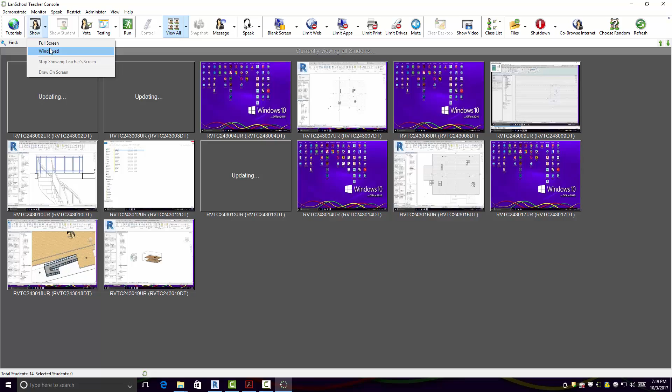All right, somebody already has that. All right, so the first thing, new. So if you're working on a template at this point, that's not right. I just did. May not be working. Let's see, window. How's that?

Really? Does everybody have a black screen? Can't do that. Not today.

All right, looks like I got it running twice here. All right, let me try again. Let me close this. All right, it says it's open. It says it's running. Isn't that something?

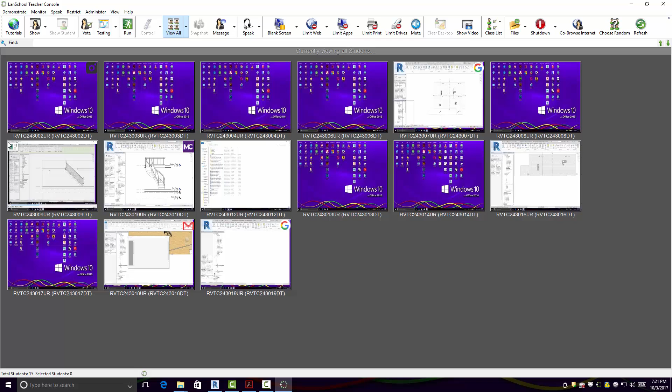Right there, you have only this thing that only one screen is active. I'm sorry? I don't know if you were supposed to click on the other screen too. It's just showing one screen. Hold on. But these are all your screens. I can see what you're working on. All right.

So usually when I do this in Windows, let me try full screen. Did that make a difference? Is your screen black? Did it do anything? Right there, do you need to click on the screen number two? Usually not, I don't. I only have one monitor. Okay, so how about now? No. Didn't think so.

I have no idea what terminal is. Did it do something? Well, that's okay. How about now? Black screen. Yep, I'm thinking we're not going to be able to do this. So that's going to be one of my complaints. And I rebooted the computer too.

So I am so sorry, but I'm still recording, so I'm recording here. All right, so you say new project, and I'm going to go find that template. It's on my desktop. Hopefully it's not spoiled. No, it's fine because it's upgrading. It's 2009.

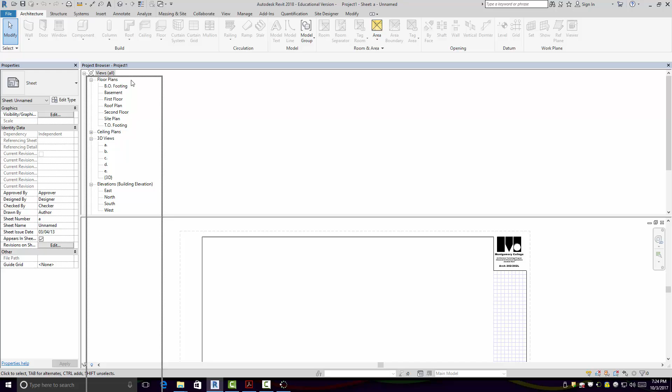E is the ramp. Okay, and so if I go to first floor, actually we did do this. I remember now, when I was starting to do my own landing and stuff, I couldn't. Okay, I listened to the tape too, but all right.

So what I got here, I got 0, 0 for the first floor, and for my ramp base I have minus 3.25 feet, which is 39 inches, which is roughly a meter, right? So a ramp needs to be a 1 in 12 slope.

Ideal is 1 in 20, but 1 in 12 is what we typically work with. And so that would mean that for every inch of elevation we go, we need a foot of ramp. So we got 39 inches, so we need a 39-foot long ramp.

Also, by code, there's a maximum number of feet for a ramp, or the elevation, actually it's 30 inches. So the maximum you can have a ramp in one run is 30 inches, right? So the maximum you can go up to is 30 inches, which is a 30-foot ramp.

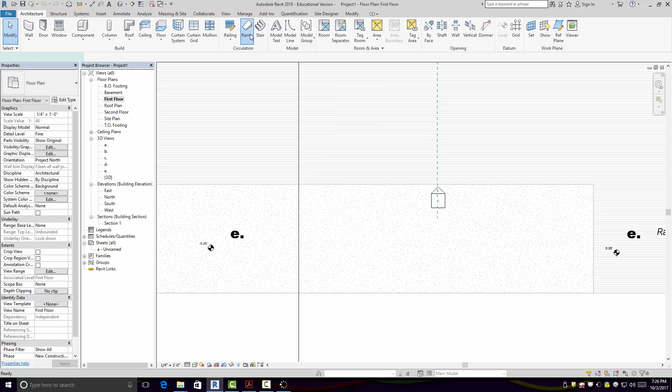So Revit automatically has that set in the parameters of the ramp type. So I go to sketch mode here to ramp. I go run, I'm going to pick run. I look here and I'm going to change the base constraint.

Yeah, this baby's phasing in and out, oh, it's in bad shape. And then I'm going to set this for first floor. Okay, so ramp base, the first floor, that's 39 inches. I'm going to make it 5 foot wide.

I'm going to go edit and make sure all this is good, and we're going to make this concrete. I'm going to make mine concrete, I don't know about you. My category is usually a generic gray, which you probably have already experienced. So I'm going to go here and break up the thing and type in concrete.

Ooh, terrazzo, look at that. It's the first time I've seen terrazzo.

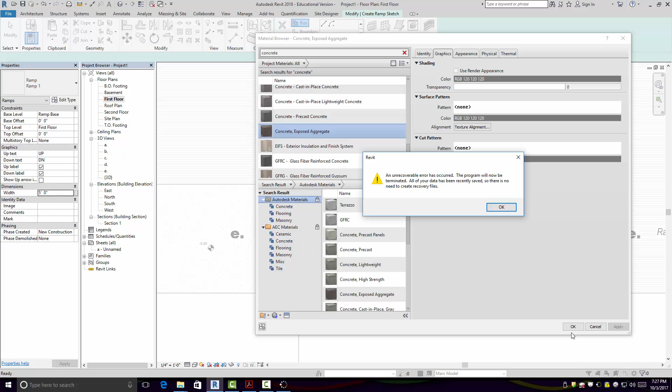Yeah, this is blurring in and out, at least I think, I hope it's not me. Uh-oh, Revit just, we just had an error. So hopefully we're not starting over again. We're kind of. All right, I'm not going to send it to Autodesk.

Okay, so I'm going to dock this. Yep, video stuff.

Alright, so I go to my first floor plan. I'm going to save it now so I won't lose it a second time. So your files are going to be your name, Stair, assignment.

And that thing keeps... can you guys see how it's blurring in and out? Is that Jan that said yep? Yeah, you probably fixed it so it would do that.

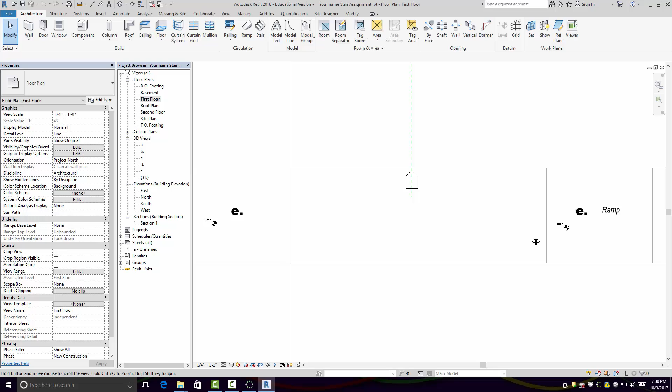Alright, so all the things I just said before. We're going to go ramp, and we're going to go run, and we're going to set this for ramp base, and we're going to set this for first floor, and we're going to set this for 5 feet. We're going to go edit here, and we're going to change this to concrete. Hopefully that's not where our issue was. Cast in place concrete, I'm just going to use that.

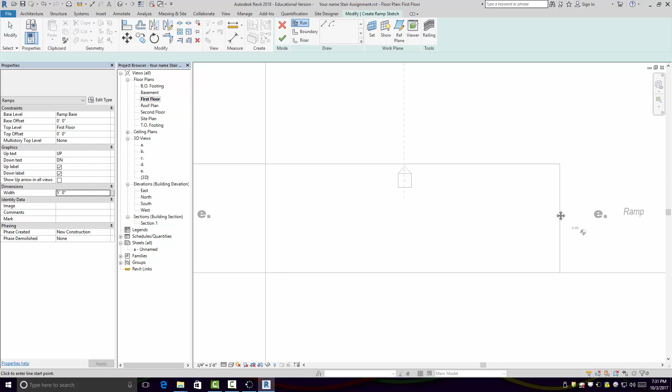In fact, I think you asked a question, which really you can go either direction with and flip the stair. So because I don't have a ramp base floor plan, I think I'm just going to do it from the first floor.

So all I have to do is set for run, and that's going to be 5 foot wide, and you can see it's actually keeping track of the feet length. It says 30 feet, and if I click, it should be saying 9 remaining. But if I click here, now it says 9 feet remaining.

See that? So if I come here and line this up right here, I can move it over here if I want. This is actually the center line of the ramp. So I'm going to bring it over a good distance, and I'm going to pull it all the way out. That's my 39 feet.

There's the landing, it forms automatically. So what you did is you stopped at 30, you then came down straight down, then followed the dotted line right here. If you remember with the component stairs, you had a location line. By default, the sketches are center line, so you have to at least clear the edges of the ramp.

So if I wanted this to be closer, I just do this, window it. Everybody's familiar with stretch in AutoCAD kind of, and just kind of move it in.

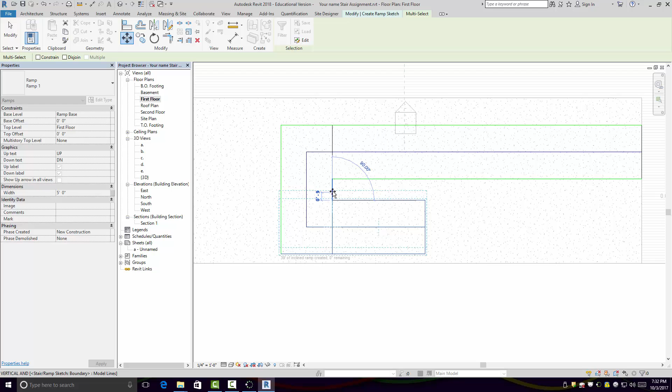I can actually even dimension it if I want. So if I want it to be a certain dimension, I could dimension this to that. Oh, it's an uneven dimension. So if I want that to be 1 foot even, pick that, activate dimensions, make this, get rid of the fraction off of this, and it moved it, and this dimension is inside a sketch. So when I finish the sketch, the dimension will disappear. Boom.

Alright, I'm going the wrong direction. But no problem, no sweat. What I'll have to do is click the ramp, and then this blue arrow at the end, I just click it and it reverses direction. It just reverses it. You go 30 feet, go straight down to the center line.

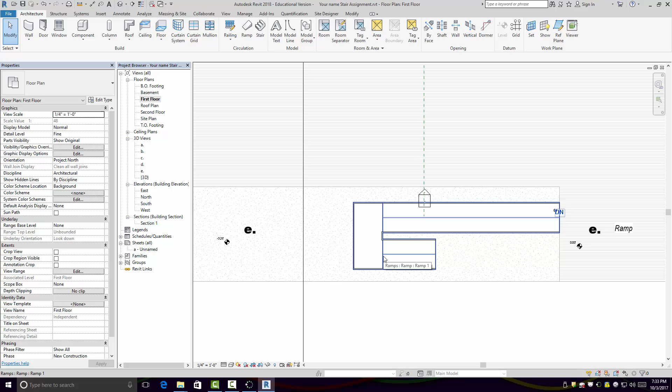You'll activate, and then you'll continue, right? You don't press anything else. Nothing else, you just have to, it will show you the alignment. You just have to be in the center line of the ramp here. There's no location line.

And then the other thing you did is, in order to bring it closer or farther, you dimensioned it with the angle, with the diagonal one, and you dimensioned that area. You clicked on it, and then opened up the activate dimension. Correct, activate dimensions, and then I could actually control what my dimension is. Make sure you select the whole area though, you got to pick everything that relates to that dimension change.

So when I say activate, now let's say I want this 2 feet, just to prove that it works, and it pushes the whole thing out. You have to highlight both, right, you have to window it or cross. Window both ramps.

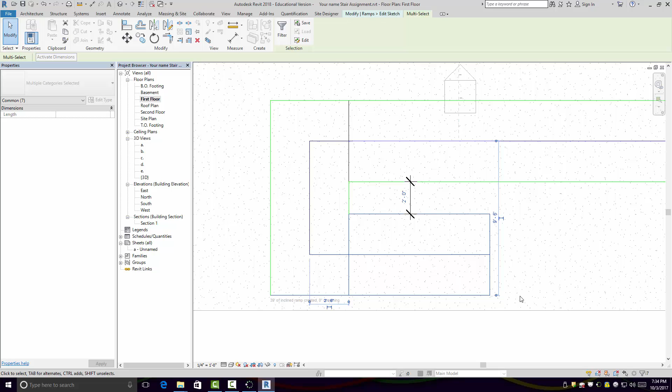No, just the one, just what I was moving, just what you're going to move. So if you wanted to move the longer 30 foot, you would just window the 30 foot.

I can move the whole thing as a sketch, or even, if let's say the configuration's just right, I can just take this and move it as a solid. I could just move it up. I just nudged it with the arrow, but you can move the whole thing. So that's kind of what that's about.

That guy looks familiar.

All right, so if I say Baroque, that's what I asked for. Baroque stair, right? So you can do something fancy, basically. And if you speak French, you know that helps.

All right, so I've got that from level F, right? It's going to be from level F. Let's see, come on now. F to C, right? No. Yes.

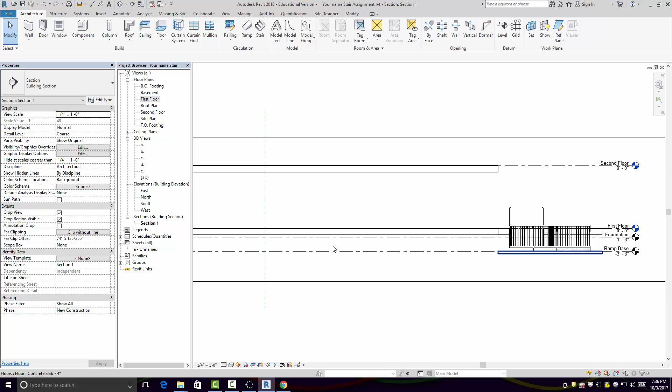It just says to the second floor, so I'm not sure, wasn't sure if it's talking about from the ramp base to second floor, or like from the first floor to second floor. Let's do it. The F's down here, so I probably meant that.

So it's actually 2 flights. Let's do a section through here. I'm going to do a section here, and we're going to do it on this side.

I'm going to duplicate this. This makes things a little easier if you do that. Actually, we were supposed to do it. I'm just trying to shortcut.

We'll say first floor, stair F.

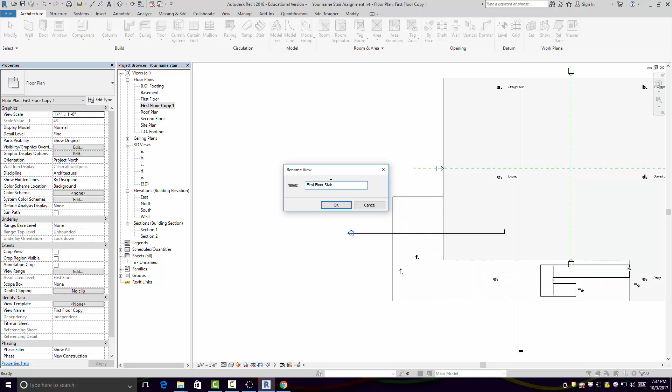All right, let's say I'm gonna have 2 legs and something, and it comes up with a landing.

Okay, if I go stair, I don't really have anything in mind. So if I do a full spiral or one of these, I'm gonna set this from ramp base to second floor, 19 risers.

So I might do something like this. And you can actually count the risers. So if I go half the risers, I might go to 11 risers created, 8 remaining. Maybe something like that.

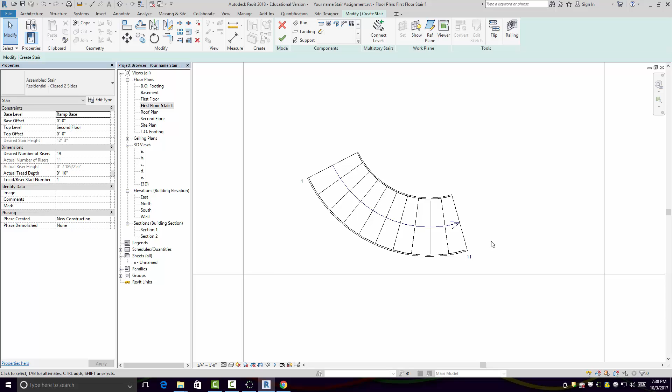That's not going to let me move it. Oh, I'm in sketch mode. Okay, and then maybe the balance of them are this direction.

Whoops. Left. So just don't forget that justification, that location line is there. Notice that it's automatically setting up the landing for me. Maybe I should have actually gone the other way.

So you could do something like that. What do you think, Aaron? You like that? Okay, you're easy to satisfy.

Let's say I move that over there.

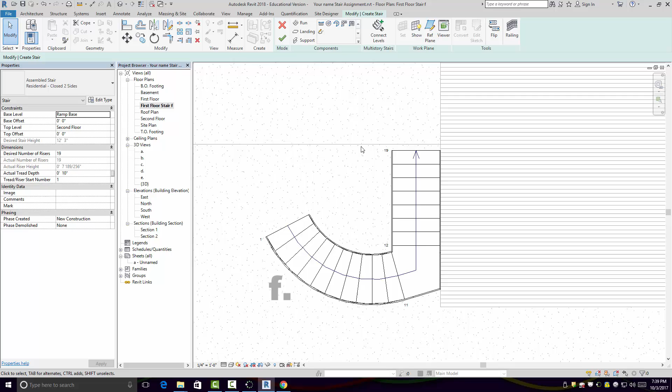I guess there's several, we could probably spend some time on this, but I'm going to take this and mirror it, so that I have two. What do you think?

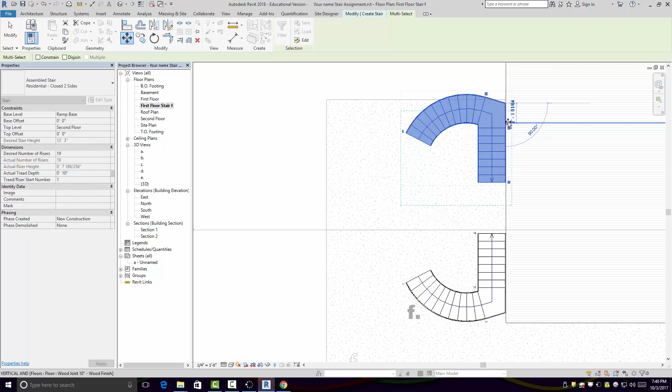You can decide what type of landing width you want. But when you finish the sketch...

Yeah, it knows it's not connected, but okay. And then the easiest way to deal with the landing is to extend the floor out. Right, so if I go edit boundary, and I go to the first floor, or is that the second floor? That's the second floor.

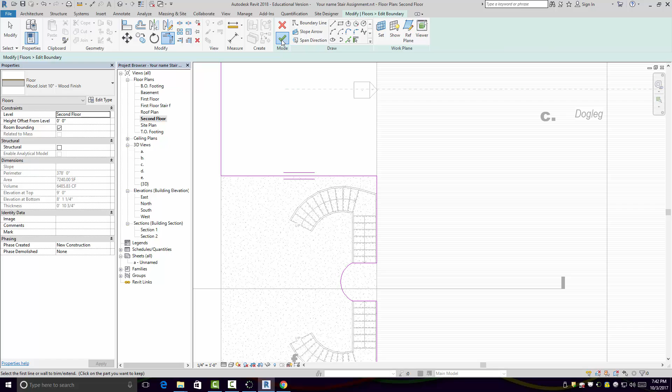What do you think? No, no, I'm not happy with it, but...

All right, so these could be different types of stairs. They could be monolithic, which makes them kind... I might get a little error message because I don't know what I did.

I probably should have started out with them. Yep, yeah, I'm out of... so it looks like that. I'm short a riser because the riser height was different.

You can do something with the railings, change them to glass panel railings.

For being short one riser, what's a quick way to remedy that? If I pick the stairway and edit it...

This was 7 3/4, right? I don't think it's too late. No, see, notice the maximum and minimum riser heights are different for this particular type.

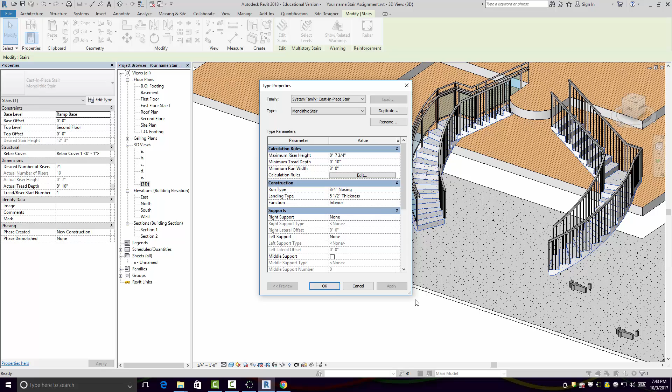So you probably should make sure that those types are the same. Actually, it's too late now, but before I changed it, I should have changed the riser height to match the one I did.

The other secret to make it fast, you can also change the railing panels before you mirror it on the other side. Or you can do them all at the same time, I guess. I didn't do that.

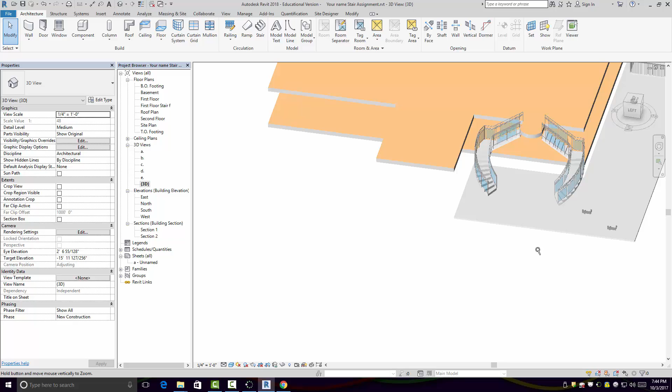So what do you think? Everybody's afraid to tell me. Man, those are lousy stairs. Well, you're short of stairs. Yeah, I think you have to do it again.

No, I really need to get to the Carlyle. I'd love to do it again. Actually I'd like to spend... didn't you hear me say I could spend some time on this, because just coming up with something? But I looked at these.

You could actually look at one, and here's the interesting one. This would be an easy one to think about. Now this one you could actually... I showed you how to edit a sketch. You would just basically edit the sketch.

The railings is a challenge, but it can be done in Revit. We're not covering that though, we don't have enough time for that, but that's kind of the same idea I had for that.

Okay, actually the Carlyle stair is a little more challenging than you'd probably realize.

So the second part of this was to put a roof and put a stair in the Carlyle. I have the Carlyle, I have my sort of Julia Childs version. I'm working on this at the same time you guys are. Let me show you where I'm at.

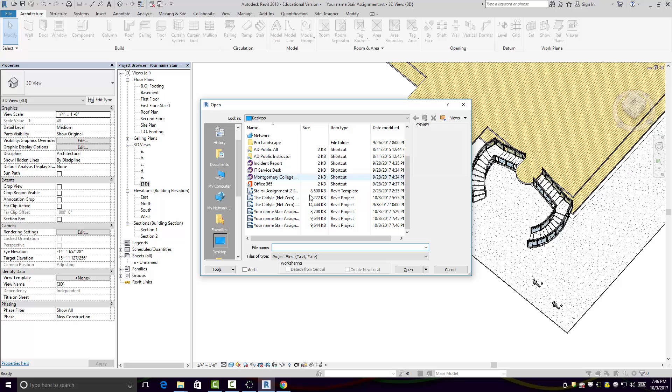Why is this acting up? This is really gumming up. There we go. Just go ahead and save it. If I open, I'm going to open the one that's more progressed further. That's got to be this one. It's only 14 megs.

So what I'm going to do is I'm going to ask you how I did certain things, and...

Is it doing that on the screen? Does it stay focused on your screen? Oh, that's right, I forgot. So that could be it.

Okay, so you probably looked at this and thought, how am I going to do this, right? Forget this, this is some kind of thatch roof. I'm not that familiar with it.

All right, so what I've got is this. It's not completely... So I've basically got two basic gable roofs, right? You've got a gable roof over here, and you've got a gable roof here. This gable roof is 12 and 12.

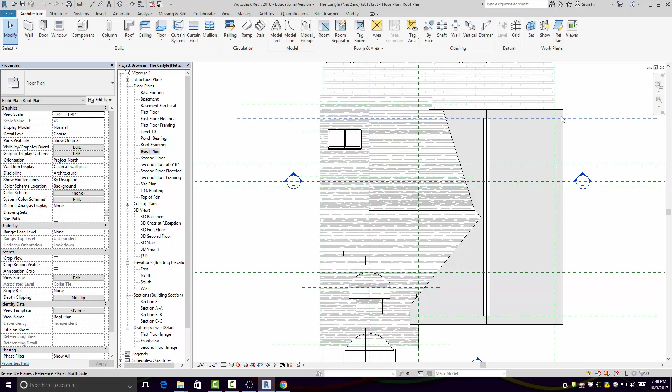Let me show you in plan, by roof plan maybe. So this roof over the second floor, over this portion of the house right here is a gable roof. Everybody following me on that?

12 and 12 slope, right here. This is 10 and 12. I found that to work reasonably well, but let me talk about it a little bit. There's some latitude for you to do something a little different here too.

So this I did by roof by extrusion, I think. Let me make sure... No, this is by footprint. So I did this 10 and 12 right here. Notice that the base of the roof is on the second floor in the back and goes down in the front.

So if you look at the picture, it comes like that, and here's the two portions. Got me?

Where you have latitude to have a little interesting fun is this front window. Now I still have to create the opening for it. I don't like having a secondary roof here, but one thing you can do is extend the floor so it actually crosses this rafter here at this level. Everybody kind of get what I'm saying here?

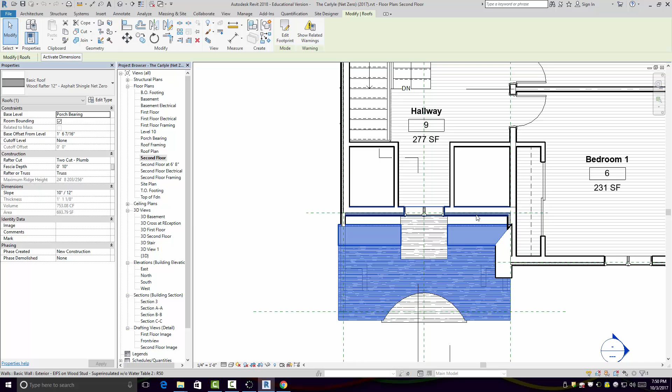So this floor I've ended at the wall on the second floor, right? See, here's the wall right here. That's the same wall as the one below it.

One of the things that helps me is I created a floor plan, because the roof is so low, it's actually cutting across the floor plan, because a floor plan is what? A horizontal section cut at 4 feet. So...

What happens is you get something like this, where I've got skylights here, and you see part of the roof, and you can actually see where the roof cuts that 4-foot plane, right? Even over here, which I have to fix. So that's 4 feet right there.

But if you were to do 6'8", which is more of a person's clearance height—6'8", 7 foot, something like that—it looks like that. So that tells me a little more about what actual space I have to work with.

All right, so when you look at it in section—the other section, I guess that's one section—it looks like this. So this line right here is my 6'8" line right here. So that allows you to move the roof up and down.

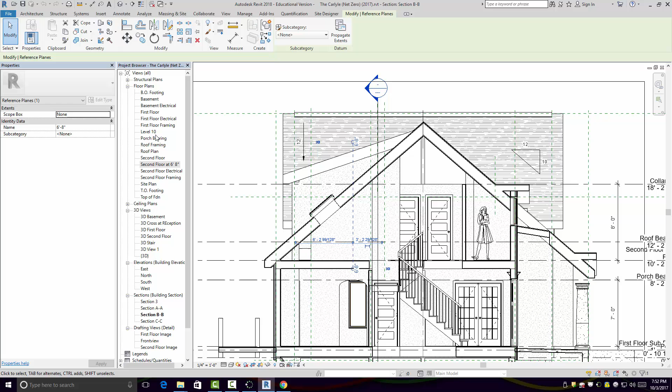Alright, so I made this roof by footprint as well, and this roof by footprint, I joined the two roofs. I'm going to go through the process with it. I joined the two roofs, and I cut the V out, right? You know how we cut the V out? What's he talking about—the valley.

Alright, so if I did this—isolate element—so this is that 12 and 12 roof. I basically took the other roof that merges into it and cut that portion out.

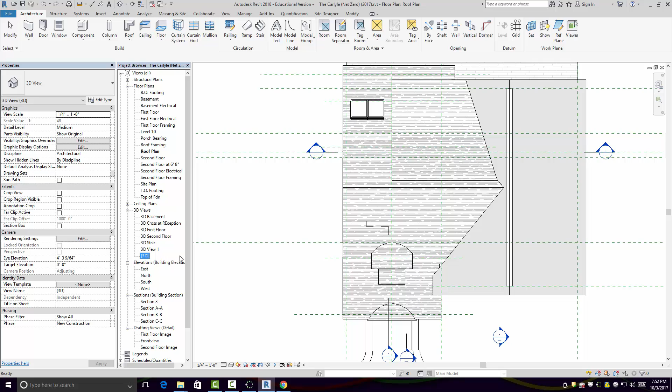I've got to do something back over here. This is where you'll probably have to do a little work and figure this out as you're working on it. But here's my other roof, right? So that's the 10 and 12 roof right there. So if I were to isolate it, it looks like that.

You can make it better. These are actually openings, right? So I used shaft or by face. Dormer works as well to create these openings. This opening, as you can see, is the dormer.

I'm not happy with the shape of the dormer. I'm going to come back and fix that. But to give you some idea of how you should do these, they're done by extrusion, right?

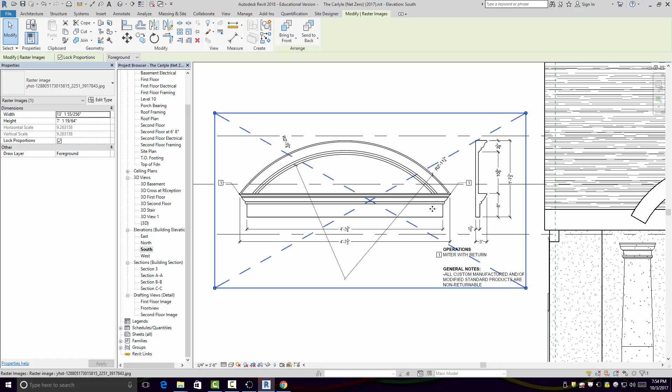And what I use for these, they're called segmental arch, right? So this is actually a raster file that you can get off the internet, and basically my radius is going to be twice this. It's more like 4 feet. Mine is a little too round, so I'm going to flatten it a little bit and work with it that way.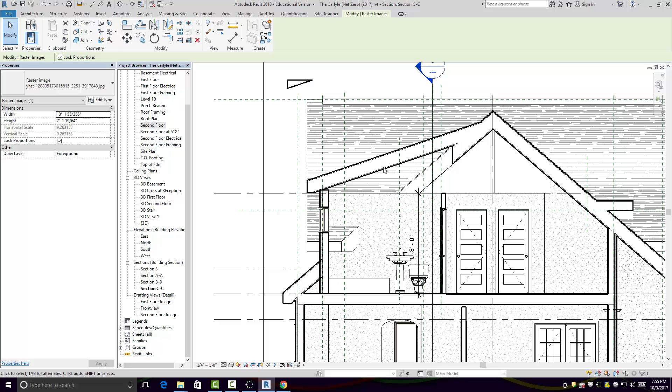And then this particular roof... isolate this baby. Looks like that. So what happened on this edge is I used the join roof tool, that's this tool right here, to join it with the roof on the other side. So when I reset this, right here, I'm working on getting rid of this right now because that actually cuts into my space, but I'm going to trim it out.

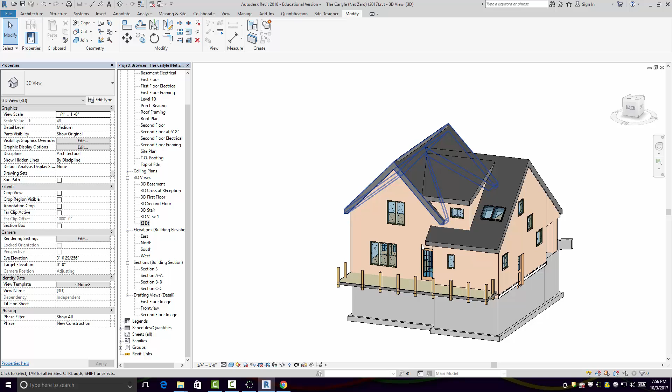I don't want to say that's it, that's all there is to it, really. All right, so that is the roof.

So I'm going to open a file that does not have a roof. Let's see... open. Actually, don't have... it probably doesn't have even enough because I might not have the walls in there. All right, yeah, this one doesn't have a whole lot to it. See that? Actually, I don't even have the lower walls. That's not right, that would not be right. Doesn't have the basement walls. So this is much earlier. Hold on. Open project.

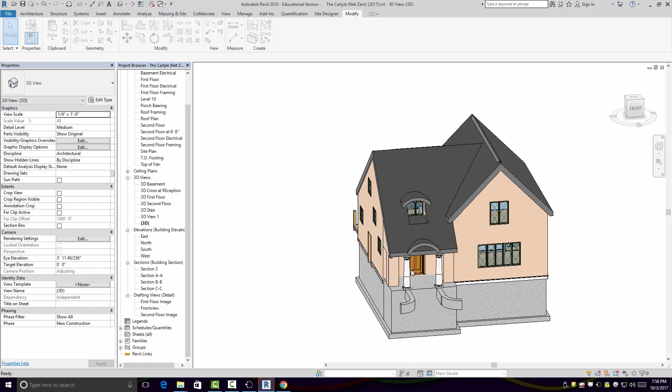Okay, let's see what I got here. Oh, that's not nice, did you see that? The Windows 10 flashing through there? So there's a display issue here. Oh, I still have a roof on there, okay, so let me get rid of the roof.

All right, so first thing is the roof on this portion. Doesn't even look like I got the layout here. All right, let's see. All right, so you're going to do a roof by footprint, so architecture, roof by footprint. I might have a little bit of overhang, 1 foot 4 inches maybe. I don't know what I actually ultimately wound up doing.

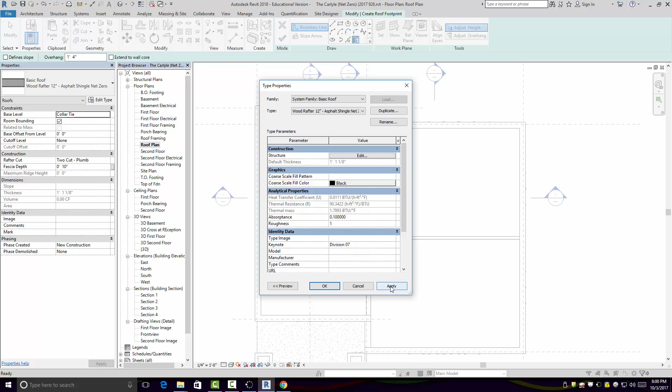One of the things you'll have to go back to look at is the wall section that I gave you. Remember, I gave you a wall section with a description of the roof, which is a net zero roof, and that roof should be asphalt shingles, roof felt. Is this it? Yeah, one difference is it's got rigid insulation on the bottom at 1 inch. All right, so that makes it kind of cumbersome because it's so thick.

But if I go here and click on this wall, turn on the slopes... bummer, all right, let me try it again. So I'm going to pick walls, right? I'm going to use a 1 foot 4 inch overhang, and I'm going to turn on the slopes. So I pick that wall, I pick this wall, the slope's going to be 12 and 12 and 12.

I'm going to pick the back wall. It doesn't have much overhang - that's actually a rake when they call it back there. Right there, and no slope, because it's a gable, right?

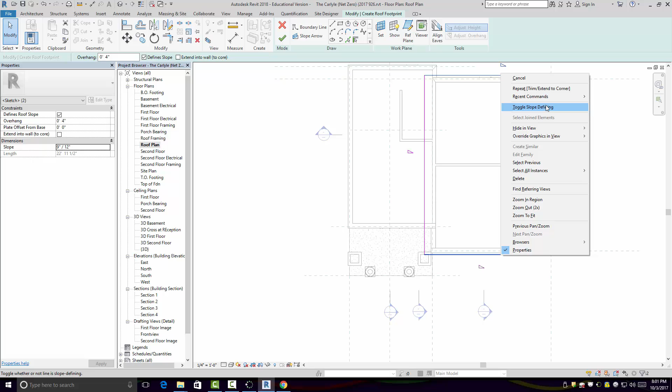So you turn off the slopes. I pick this, touch the control button, add this to my selection, do a right button click, and say toggle slope - that's the other way you can turn the slopes off. So I have 9 and 12 on this one, and then I played with this a little bit, so I'm going to set this at what elevation?

It says collar tie, but that's not where I'm going to set this at. Roof framing, which I think is actually a little low. And then I'm going to say finish, and go ahead and attach the walls to the roof. So my roof looks like so.

If you have a wall here, what it'll do is it'll attach the wall to that, and these doors are here, and it becomes obvious that this part of the roof won't be there when you're done modeling it. So what do you think? It's better to do the gross sort of roof cover and then go back and modify this space.

I gotta understand the question. So if you did that roof, now you're going to do the other roof, but you're going to leave the current roof in place. Once your roof's all there, you start to line them up geometrically and join them. Yeah, or modify them, open your volume up. That's the only way I'm going to be able to do it - once I match it with the other.

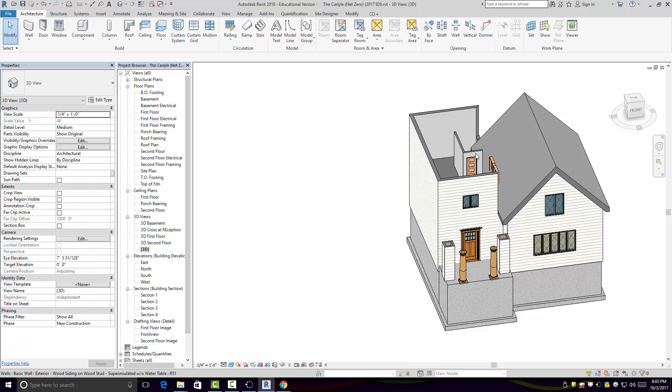In fact, I'm saying there's some latitude to express yourself with this - it's actually kind of a neat way it is. But anyway, I'm going to come back here, and now I'm going to put this one in.

And that one I'm going to simply do by footprint. I'm going to do it by footprint, but sometimes it's not a problem to do it by extrusion - but I'm just going to do this by footprint. So my slope is going from front to back, right?

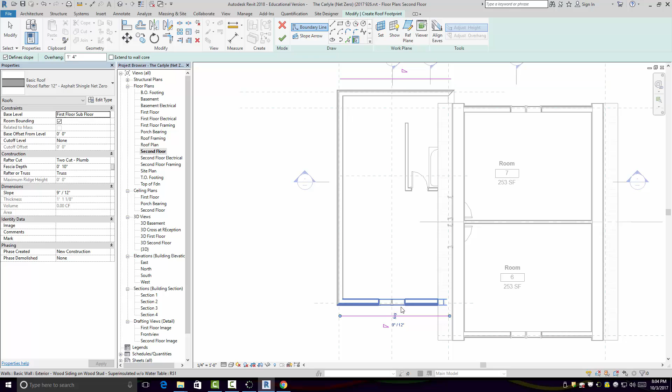Actually, let me try something different. I would have done this anyway to see how it worked. So I'm going to put an overhang of 1 foot 4 inches over here. Actually, I've got a porch here with columns - I gotta address that, right?

Right, so it really should be out to here. So I'm just going to pull it out here, or I could have drawn it out here or whatever. But I'm going to pull it, and put one here with the wall.

So we'll just make this a 4-inch rake, but turn off the slope on this, and we're going to trim this out. Oh, it's already trimmed out. All right, maybe let's try.

I'm going to try 12 and 12 here - I think this has to be flatter. And then I'm just going to connect the two with no slope, because it's a gable end, right?

And I'm going to set this for second floor, and I'm going to finish it. I expect to get some fussing, but it seems to be working. All right, so when I look at it, it looks pretty bad. So that's why I had to flatten it.

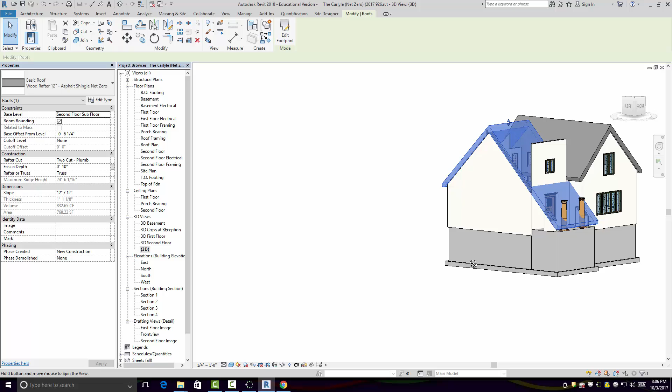So you could have actually a bigger dormer up there - everybody kind of visualize that? I could cut this and have a bigger dormer up here, except my roof here would be too low. And then I would just maybe divide the roof and make it a different slope, but it's better if it's one plane.

Alright, so I'm going to come here and go back to second floor, pick this one, and edit the footprint. And we're going to go ahead and make this both - make it 9 and 12.

Let's make it 8 and 12 - make it real interesting, see what we get. Alright, and then we'll look at the section. So there's way too low. So for it to work, it has to come up here.

Actually, I want this - this is kind of my controlling point right here. Well, this could work, it's a little different.

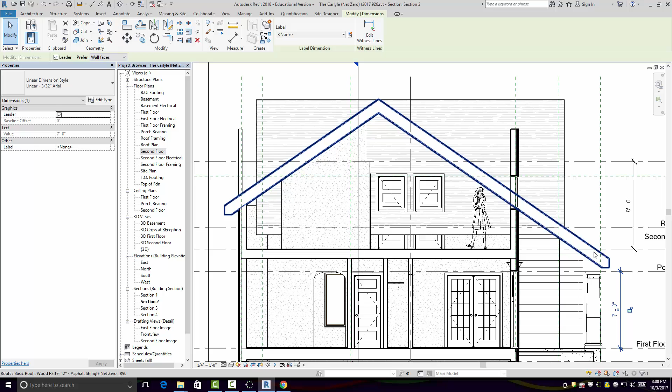Actually, that's not too bad. I've actually got some height here. In that other scheme, I've come down here and it's actually crossing the floor, but this might not be too bad. Let's take a look.

What do you think? Is that why you're saying put a dormer in that space to bring out the height? Right, in that one spot. If you look at the original plans, this is kind of like the dormer. So all this area is supposed to be roof, right? All this right here.

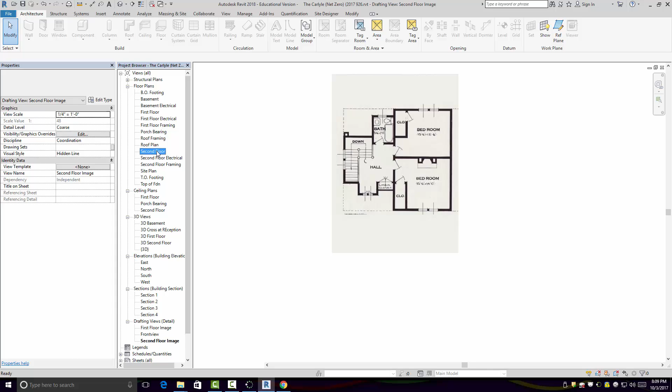And so if that's going to be roof, then I'm a little different. I don't know how accurate this is. This was a marketing data roof plan, so it may not have been as accurate. Actually, that's pretty good. What do you think? Should I go with this?

All right, let's say I decide to go with this. I'm gonna go modify, and go roof, join roof. Touch this edge to this plane, and that roof will join with that roof.

Do I have my little... I still have my person, so this wasn't that long ago. The dormer here will have to be up at least up to this point, right?

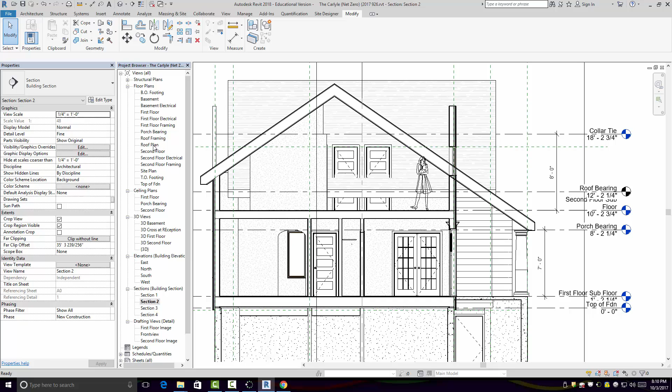So I'm going to go back to this plan, roof plan. What am I doing for time here? Second floor plan.

This is opening by face. You could do that, or you can use... I don't think this dormer works for this. Nope. Or shaft.

Gotta see what I'm doing here. A little too early to put that in there. So let's look at the front, south front. Yeah, this one's going to be bigger. This is bigger than this. This is pretty tiny.

So we do the segmental arch by going to roof by extrusion, and we're going to pick a plane. I'm going to just pick this plane right here, and then we're just going to make an arc.

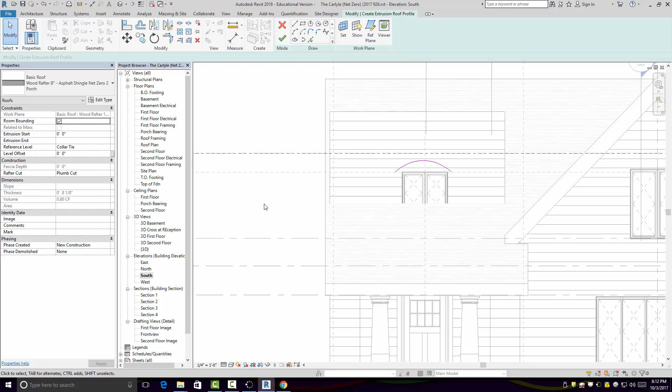I'm going to change the roof type to 8-inch. 8-inch framing would be 8-inch instead of 12 inches, so it won't be quite as thick. So it looks something like that. It's really not that great.

Okay, I'm gonna take this, make it a two-cut plumb. Give it a fascia. A little better. Yeah, that's a little high.

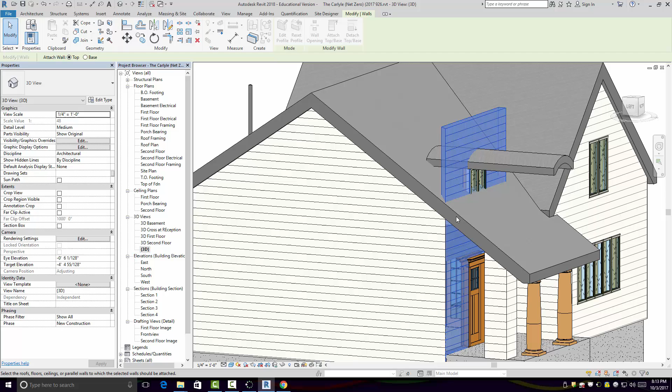See, if I attach this to... I can either attach it to this roof or I can attach it to this roof. Only part of it will attach to this roof. So if I attach it to this roof, I knew I would get a... it's gonna eject the windows because the windows aren't applicable anymore.

I'm sorry? How did you set it before? Originally it wouldn't accept it because you had a window there. Actually, I've got to do something with this wall, and normally you would just attach it to this roof. And actually, I could come back and put the windows back. It just killed the windows.

So when I look at the section, and the reason I've got this lady here is so that you can see - if you're standing there, this is what you want to be able to look out the window, right? At that certain elevation, so you'd want the windows. Actually, the windows are a little lower. Well, if it went up there, that would be pretty good.

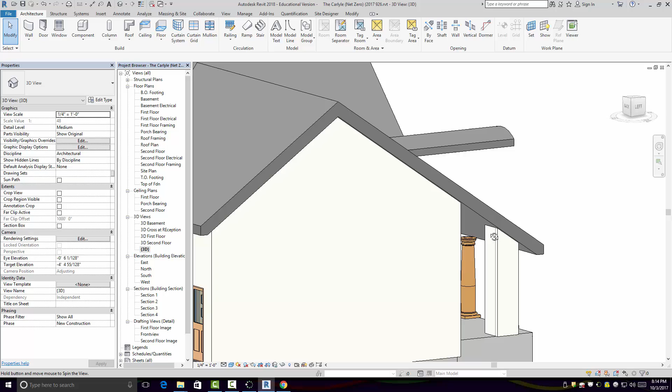So if I join the roof, if I take this, join that - too small. So maybe I want to make it bigger.

So if I looked at this section here, think about the things that would happen if I flatten my slope a little bit. That's not going to get me much. All right.

I'm going to make this a little bigger. So what is it now? Edit Profile. It's 3 feet.

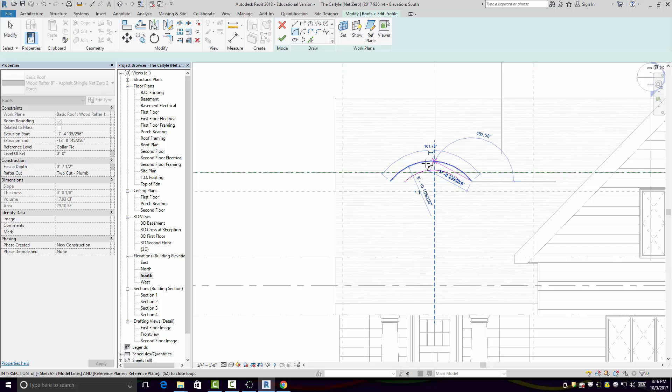You might want to be more measured than I am being here. Not might - notice I'm doing it by eyeball. So if I got something like this, I want it to be symmetrical, so I need to make sure I have it in the middle. See, that's not quite on the middle, so I'm going to move that to the middle.

And you could actually make several until you find the right size or right thing that really works for you. What do you think? Any opinions? No opinions. Now, if you'll notice this one,

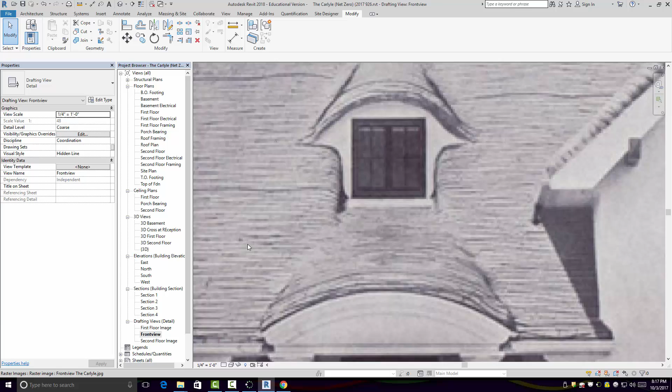it's kind of tucked in versus sticking out. That's kind of odd. For it to be tucked in, it would have to be like this. There'd have to be a flat area here. Is there a flat area? Do they show a flat area? Let's just distort it.

So if I bring that to here, alright, and then the south—you guys are quiet. Is everybody awake? Guess not. Architecture, no questions.

You just verbalize what you're doing each step—that'd be good when I'm listening. If you verbalize each step, right now I'm going to put the segmented arch here. It's just because when you're listening, it's hard to catch where the errors are going.

So I'm kind of feeling my way, kind of designing here, because it's not exactly like it is. I want to give people a little latitude to change things a little bit. So let's say if I got that radius.

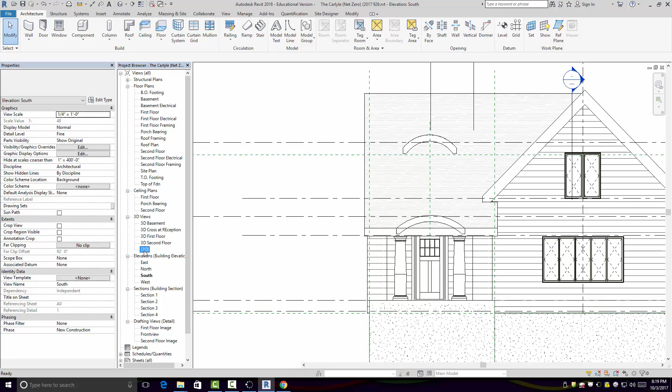If we look at it in 3D, it looks kind of like that. So I can pull this out.

So join roof edge. And roof plan—I can always go back to roof plan, right? What's the definition of a roof plan?

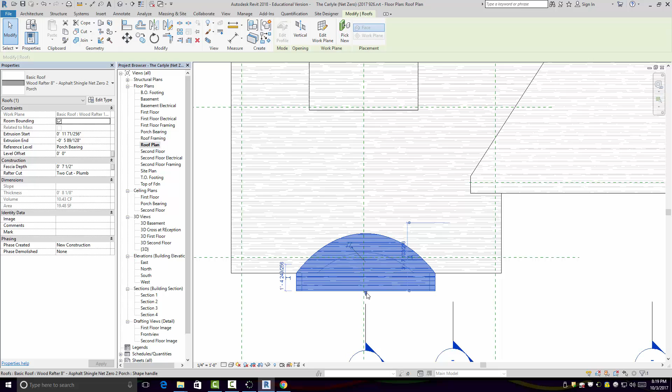You just totally ignore me. What makes a roof plan different than a floor plan? The roof plan is for the roof, the floor plan is for—it doesn't have a section, it's just showing the top of the roof. Right, it's more of a bird's eye view than a horizontal section. That's so—Ben was over there going...

So, all right, I'm gonna go here, wireframe, and I'm gonna just edit this foot. Oh no, I'm not. I'm going to—yes, I am. How come I can't see that?

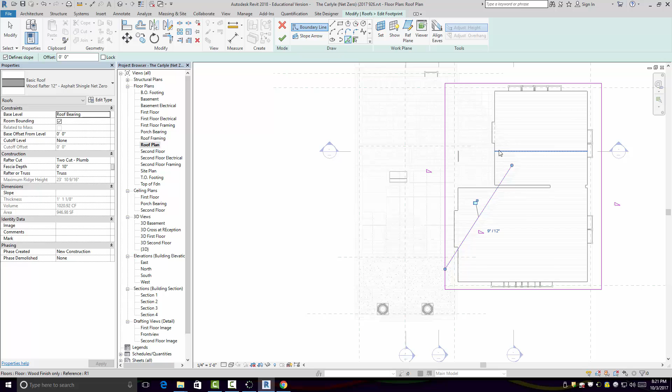No, I mean you can see it. I can kind of see it. There you go, but normally you see it better. So if I say pick lines, and I pick the inner lines here—actually I probably got an underlay on here or something. So what does that mean?

You have an underlay there? There's probably an underlay on that makes it a little noisy, so I couldn't see the lines of the valley. So that's what I was cutting, the valley here. You're going to turn the slope off. I'm going to trim this out.

And I should be able to maintain my connection. Yeah. I think it killed my roof. No, it didn't, okay—it just killed the walls. So the walls popped up.

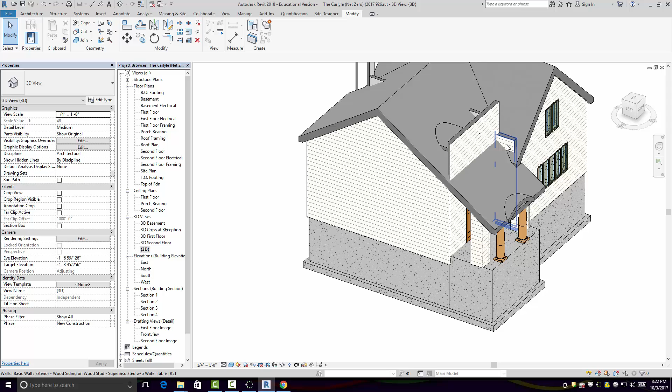All right, so what happens usually when the walls pop up like this, you can attach them back. And if that line crosses, are you attaching them? Just drop it—I'm gonna just drop it for now. Later on I'll show you how to profile the walls, so you don't have to—if they won't attach, here's what you can do to them.

Like if I take this one, this one—let's see if this one attaches. Yep. This one wall crossed the valley, so that's why it wouldn't attach. I'm gonna reattach this. And we're going to pull this pup back.

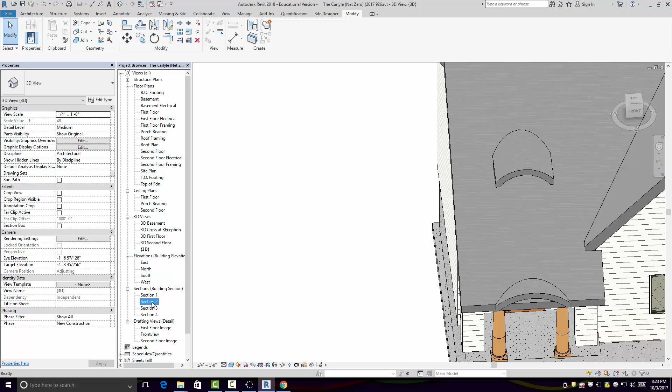Midwestern lingo there. Maybe we pull it back to here. And so maybe our dormer's back here in this case. Everybody kind of see that? So if I look at it in roof plan...

And try not to go too—I got underlay on. What I'm talking about, Steve, is no, it's not on. Well, I got wireframe on, that's probably why I can see too much.

All right, so if I edit this roof, edit footprint, and I pick lines, and I pick the inner lines. This is not—okay, now I can see it. See that? Everybody see that? I'm picking the inner lines.

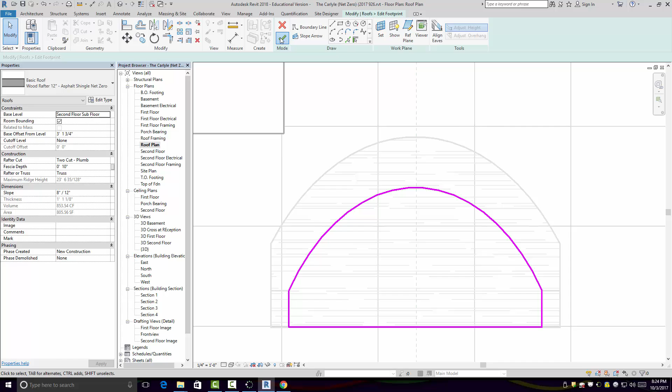Hopefully I'm picking the right ones. You guys aren't talking to me. If I pick that—yeah, it works. Maybe it didn't. All right.

So you'll get little errors, and they're not really errors, but you'll get warnings. How's that? Like that? So now I need to put a wall up there. So when I look at it in section, it looks like this. It actually cut something I probably didn't want it to cut, but I think that's okay.

So if I go back to a roof plan and I pick a roof type, a wall type. Now, usually you'd want this to be insulated. You may have to form new walls.

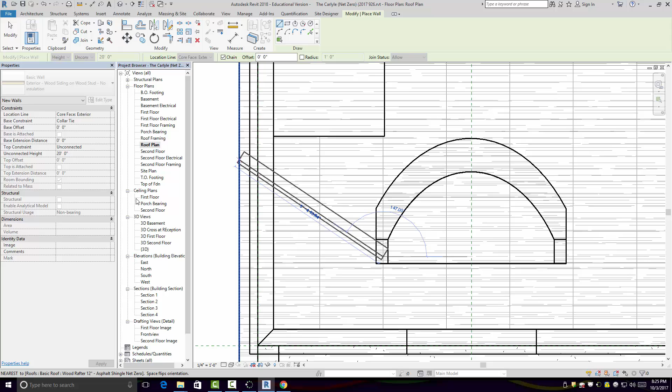For example, my exterior wall here—maybe I pick the same wall and I reduce the thickness of it. And if I draw a wall here... go in the wrong direction.

Look at it in 3D. I'll attach base, assuming I'm right over the roof. Oh, not quite, some of it is.

Pick that and say attach. Oh, okay.

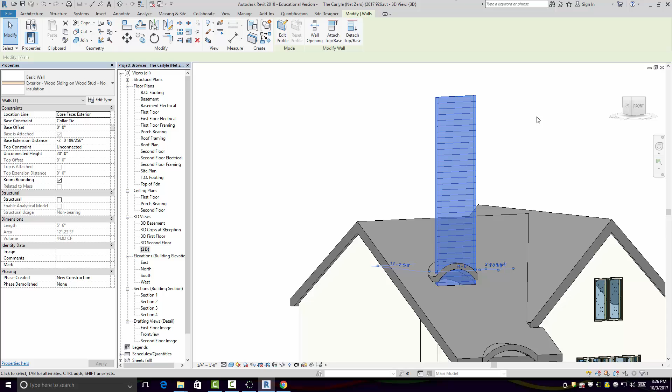I think... yeah, it's not gonna work, it didn't like that. Joining the... actually, another wall type would work. So if I create some other... oh, I actually have some other types of walls. Let's see.

Yep, still... okay, this one might require me to work on it a while. Yep, oh, that's why. Base extension.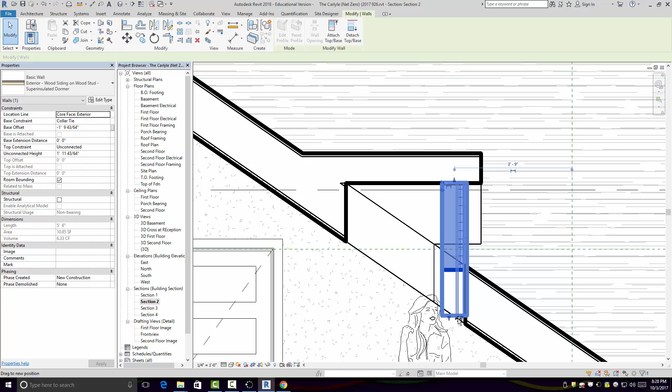I'm going to detach. I shouldn't be using a double layer like that, but I'm just trying to hurry up here now. But anyway...

So I've got that, let's see if this works. If this is in the right position now... yeah, it's in the right position now.

So that's that dormer. I have not enough room for windows. So if I wanted to add windows, what could I do?

All right, I could either raise the dormer. Well, actually, it's too high now. I really should lower it, actually, right? Because this is 6'8" right here.

So this could be like... there's actually windows that are shaped like half circles, radius...

Boy, they've added some stuff on. So something like this. Although I didn't, I should have been a little bit more measured, and I doubt if this will even fit. I'm not measured, I actually should have designed this so that this fits. Let's see, it's not gonna fit, but we'll just...

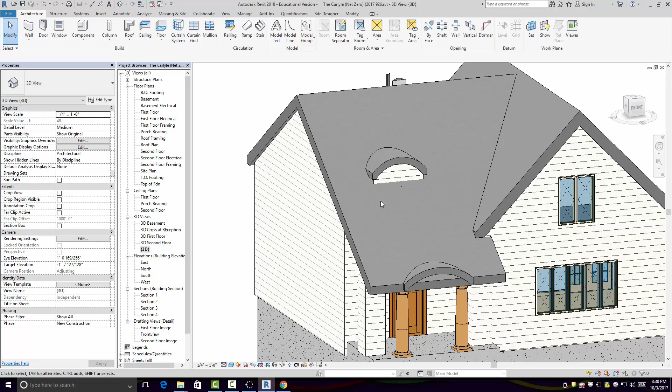So it's not going to work in here. But I could have gotten it to work in here. So if I were to come back, actually, I may... oh, there it is. So I open this up a little bit and bring the wall down.

So how do I get a hold of that? Do I see it?

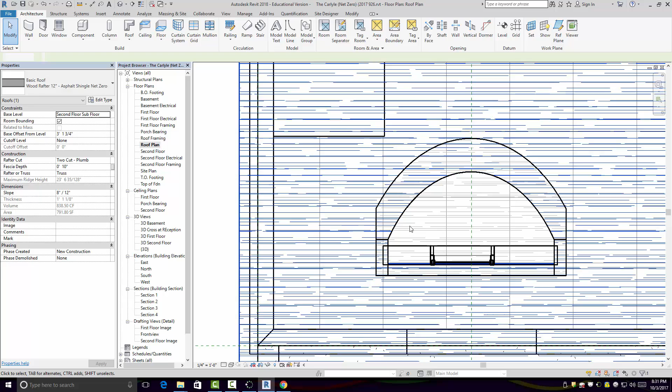I'm trying to get a hold of the opening. It's kind of late. Well, I can't get a hold of it.

Wow, this thing, does everybody see how it's fluctuating? No? Yes? No? No, but...

Sometimes openings are hard to get a hold of. So it still won't expose the opening.

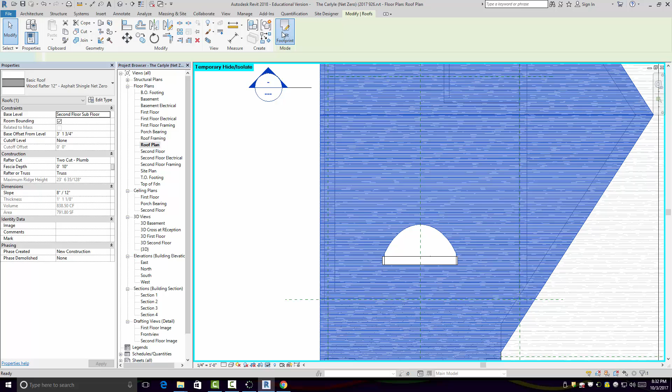Actually, I drew that, didn't I? Late in the day. So I could move this down. Let's see what happens. Didn't like me for doing that.

Roof plan, roof plan, roof plan, roof plan. Okay. I've got a little roof issue now.

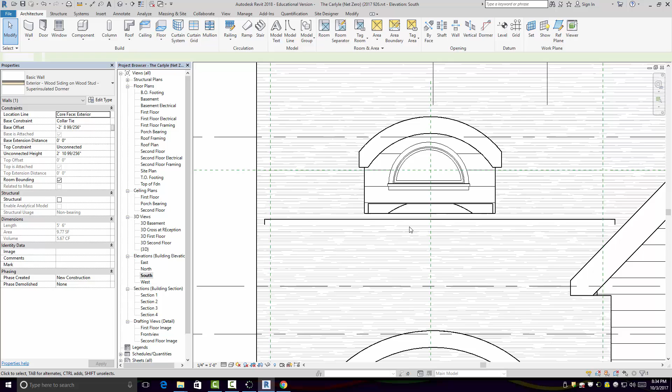Alright, so... man, I knew this was going to take a while.

Questions? Questions on how to get started? No questions? Not now? You will. What's your phone number? Good.

This is the advanced Revit course. Well, no, this is not advanced.

All right, so I mean, you have to start getting a stab, but you got... let me ask the question... you got the general idea, the general gist. You know how to start. Okay, that's good, that's good.

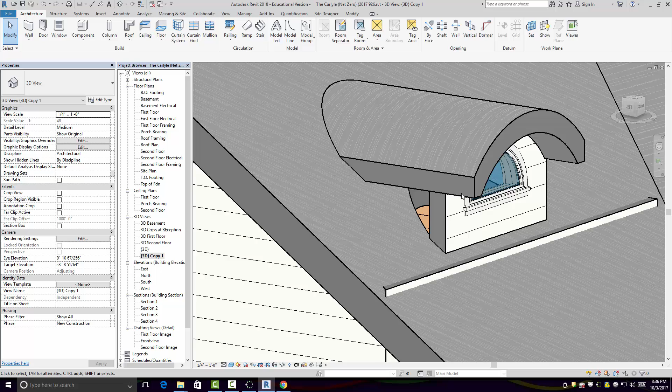All right, so with the dormer, you just have something in mind that you're going to do. That's a little better. Actually, I'd want this to be down here, very similar to one I had before. I guess I wasn't under the pressure of having to. I tried something different here. Let's see.

So if I move to the other file... it's not that one. I got two files here. So if I go to that file, actually I still have to open...

So you got, even working with this, I had to work with the opening a little bit. So I haven't even changed the opening on this one. So the opening here needs to go up here.

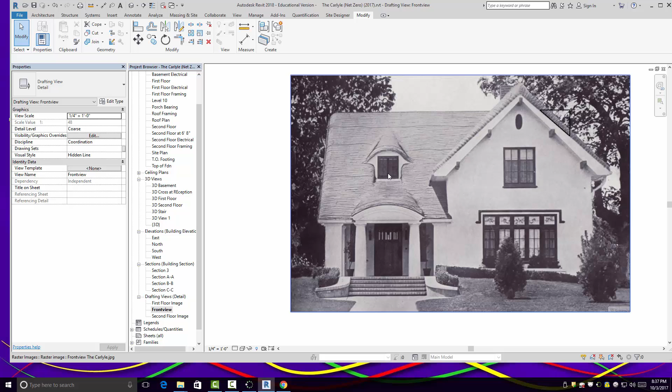But basically, you want somebody to be able to stand at the second floor, right? The second floor, and go to the window and look out the window on the dormer. And that is this right here. Right? That's this window right here.

So that's that. And I didn't even see, I have a window here, and I still need to push the opening back here even on this one. This slope was 10 and 12.

That one was 8 and 12. Did I do 8 and 12? Yeah, so you could see the slight difference. You might want to play with both. Make a model of both roofs and kind of look at the roofs together, and then decide.

And then of course you're going to cut the roof out, like when I was showing you before, like this one.

So this will be the challenge for everybody. It looks like, and this is a challenge as well. But let's see, do I have a cut? Do I have a section cut? Like this. All right, so basically, when I cut across, it looks like that.

I don't have a ceiling in here yet. We haven't really talked about ceilings, but I'll have to show you the ceilings. I started the stair. I want you guys to work a little bit so I can come around and answer any other questions you got. But let me show you the stair.

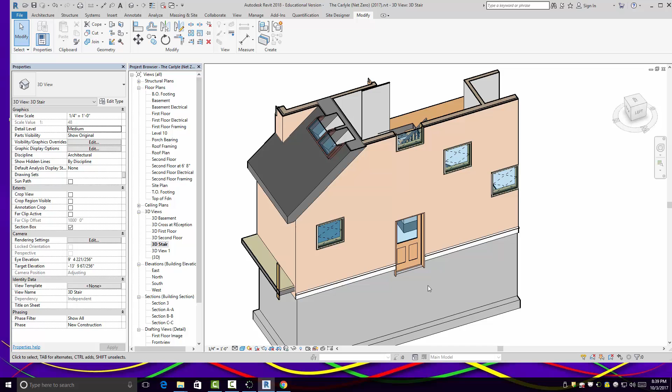So in the case of the stair, it looks something like this. So this is the side entrance, right? So this is that side entrance. Notice it's not at the floor level; it's a little below the floor level. This is a section box, right? So it allows me to see what I'm doing here.

And one of the things I got to clean up here is this closet's under the stair, so I need to clean that up a little bit. I got walls sticking up. But when you land upstairs, you land right here, and there should be a railing here. I'll put a railing there.

Right here. This is kind of dead space. This is my 6'8" line right here. So anything 6'8", so I could actually make the landing bigger.

I could actually even open this up to the kitchen below. Something I've been thinking about. So the kitchen would be this area right here. So you could actually have a clearance in the kitchen. Let me see if I got a...

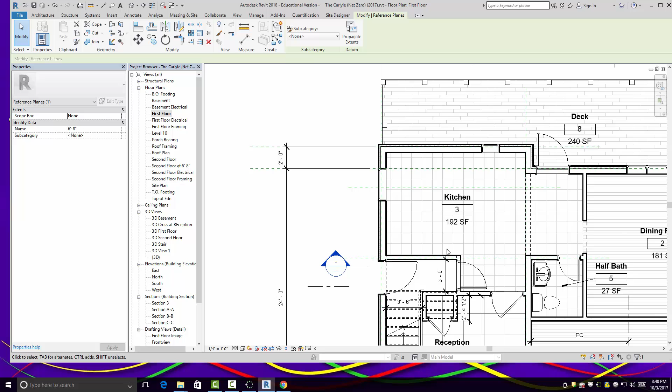So am I looking at the right one? Yeah, I think I am. By the way...

Room tags I always forget to talk about in rooms, so that's something we'll talk about on Tuesday. Oh, come on.

Right here, see the kitchen right here? So look, see all this floor area right here? See this floor area right here? This floor area is not really doing anything, right, if you're on the second floor. So why not just get rid of it and then have a skylight above the kitchen below?

Some thought, but anyway, you come up the stairs, you land right here. There's a railing here. You come out. There's the dormer right there. This is a closet.

Again, a tip to help you a little bit is you might want to create a floor plan that's at 6'8", so you can see where the ceiling crosses a decent level height. I know nobody in here is 6'8", but that's kind of like by code you have to have that to be an occupied space.

Right, that tells us. Okay, yes it does, actually the floor plan tells you that. So when you see this floor plan right here, and see this down, this is actually at the first floor level. So you actually go down 1, 2, 3, 4 risers, and there's a landing here, and that goes outside.

I mean, you can make up the height because you don't... yeah, you make up height. Actually, you have plenty of height. And then here's up, right here, up, and then it actually comes here, and there's a landing here, and then it returns, and that's it on the second floor. So that's the second floor looks like this.

So you come up, and I did something a little different with the windows. You come up here and you land, and here's a railing here. Notice the scale of mine and this is a little different, but I'm actually more accurate because I'm modeling this, and they just drew this.

So just assume, when you start putting the roofs on the second floor, there's a lot of planes that cut. If you cut the room in half, be mindful that when you enter the room, at least make it 6'8" so you can walk to the end. Then you cut out the roof and make another ceiling, or a dormer, or a higher ceiling. Just be aware there's reason to be concerned about head height.

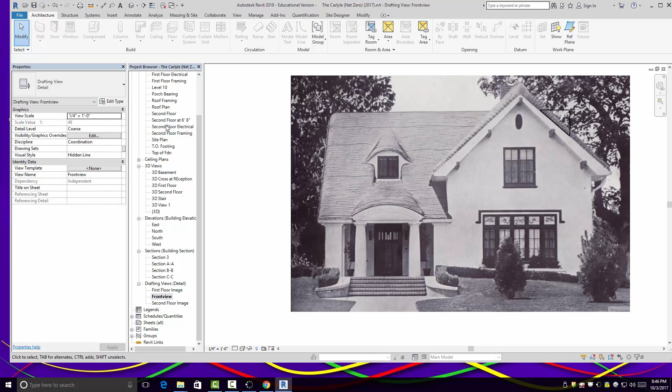I'm thinking my kitchen is going to be 2 stories. It's going to have a little area that's 2 stories because there's not much you can do with this space here. You just get rid of a ceiling first, that's all you do, the framing, that's all you're getting rid of. So when you walk into the stairs, you can see to the kitchen, you can see down in the kitchen as well. So it's kind of neat.